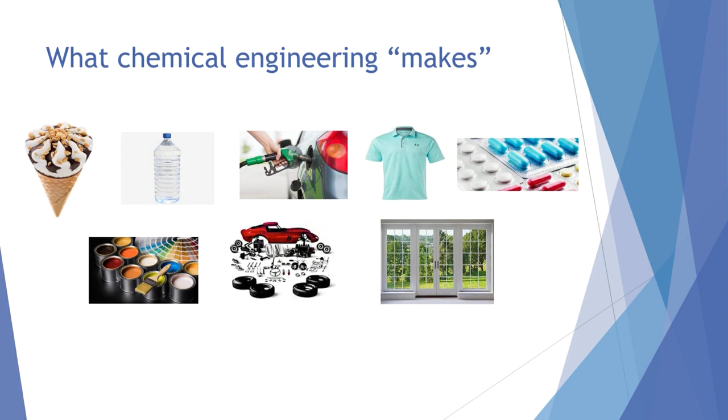What we put on textile, and what we take when we're not feeling very well. This is the medical products. And of course, chemical engineering makes a lot of other chemicals and materials. For example, the things we use for decorating, for driving, and for building the houses or other construction. So it also makes what we play, such as things we use for sports, for music, and arguably most important for some of us, this one.

But in order to make all of these, we will have to build a chemical plant or chemical factory. So this one is an oil refinery, a picture taken at night, which looks quite spectacular. This is for making different types of fuels. And this one is very different. It's smaller but much neater, I guess. It's a pharmaceutical facility for producing medical products.

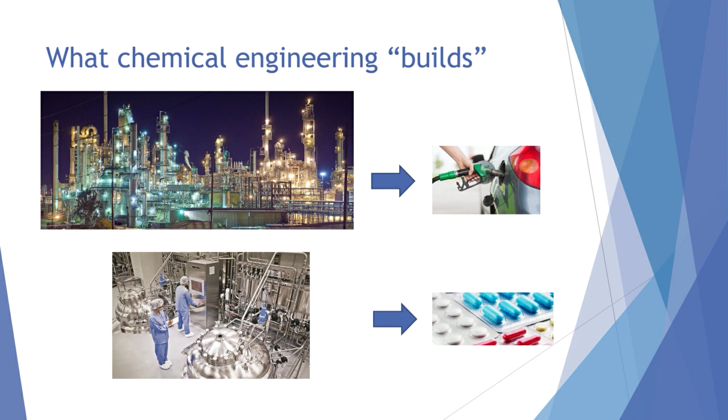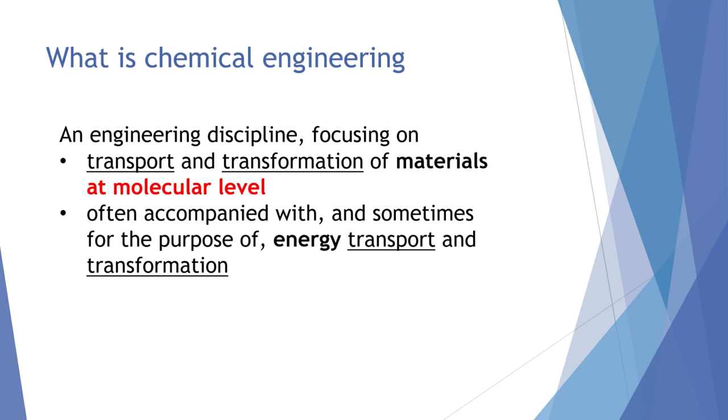So we have seen what chemical engineering makes and what it builds, but what is chemical engineering? I would say it is an engineering discipline which focuses on transport and transformation of materials, accompanied with the transport and transformation of energy. And what makes chemical engineering really special is that we do these things on materials and energy primarily at molecular level, which marks a key difference from, for example, civil engineering or mechanical engineering.

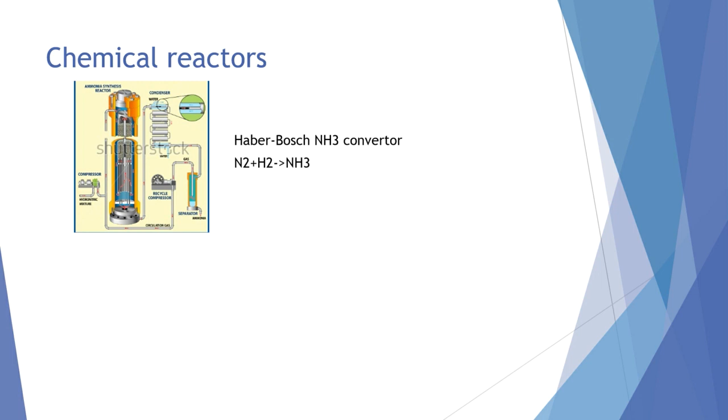Okay, so at the core of chemical engineering is the concept of reactors, and we have different types of reactors. If we start with the conventional chemical reactors, here I have got an example, which is the Haber-Bosch converter for producing ammonia from nitrogen and hydrogen. I put it up here because it is one of the earliest reactor designs operating at high temperature and high pressure with catalyst. And the other one I show here is taken from an oil refinery, a fluidized catalytic cracking unit, or FCCU, which is for producing short chain molecules from long chain hydrocarbons.

So the reason why I put up these two reactors is because they do carry some historical importance. If you look at Haber-Bosch reactors for making ammonia, many people believe that this kind of chemical synthesis of ammonia enabled by the Haber-Bosch process has played a very important role in food production, because ammonia is a major fertilizer, and this has been very important for sustaining food supply for the growing world population.

And what about FCCU? People who are familiar with the history of the Second World War might have seen the statement about the importance of the fuels produced by this technology in the victory of the British and US Air Force, because of the supply of high quality fuels required for the air forces.

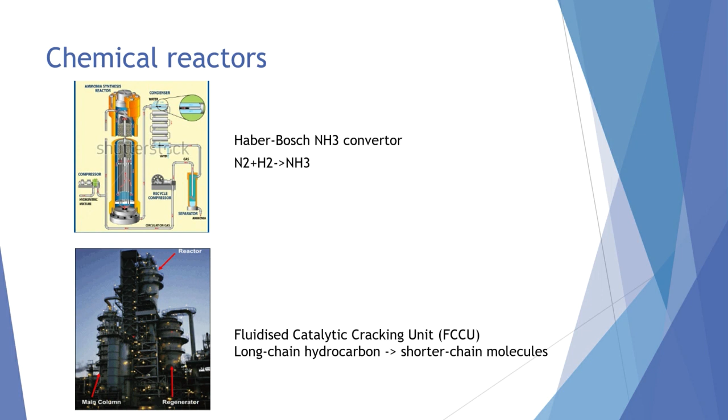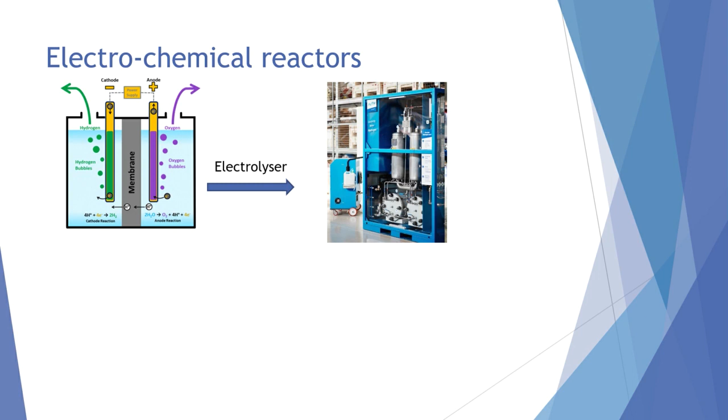But of course, reactors are not just chemical reactors. There are other types. For example, electrochemical reactors, which involve the conversion between chemical energy and electricity, and this includes electrolyzers, which convert electricity into chemicals, and fuel cells, which go the other way around, converting chemical energy into electrical power. And these kinds of reactors are becoming increasingly important in the context of generation and utilization of renewable and clean energy.

So then we have bioreactors. It's a very important type of reactor. Here I have an example of a fermenter. And some of you might know that a key microorganism used by a fermenter is yeast. And if you zoom in, you can see within these cells you have complex biological machineries which can be used to convert substrates like sugar into valuable products like alcohol through fermentation processes.

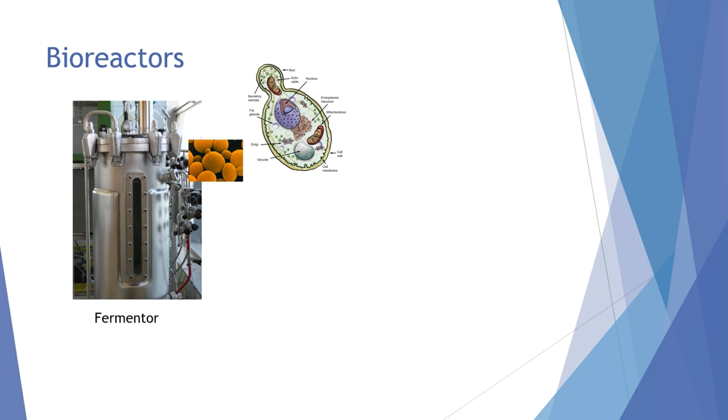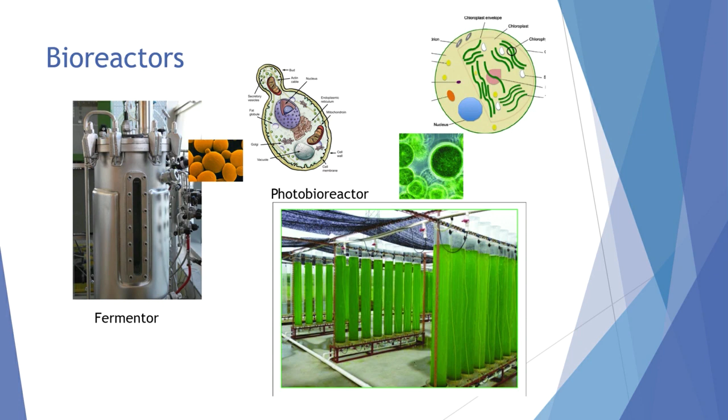And another example is the photobioreactor, where microalgae are cultured. These are unicellular microorganisms, again with an interesting set of bio machineries which can convert CO2 into biomass through photosynthesis, and then the biomass can in turn be converted to useful products. But of course there are many other examples of bioreactors. I'm not showing more examples here, but just to say that this biochemical engineering branch of chemical engineering is becoming more and more important in many areas.

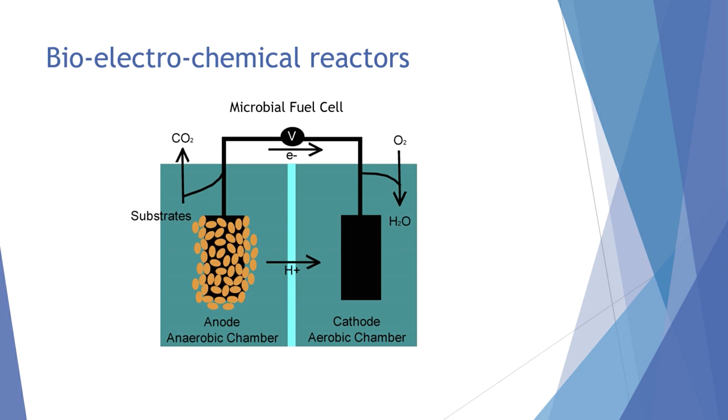So these are the reactors. But in chemical engineering, we certainly need reactors, but the operation of reactors will need to be supported by some other so-called unit operations, such as for mixing, separation, heat transfer, and pressure change. And in fact, the concept of unit operations was formed in the early 20th century by pioneering chemical engineers such as Professor Arthur Little, and the formation of this concept of unit operations somehow marked the birth of modern chemical engineering.

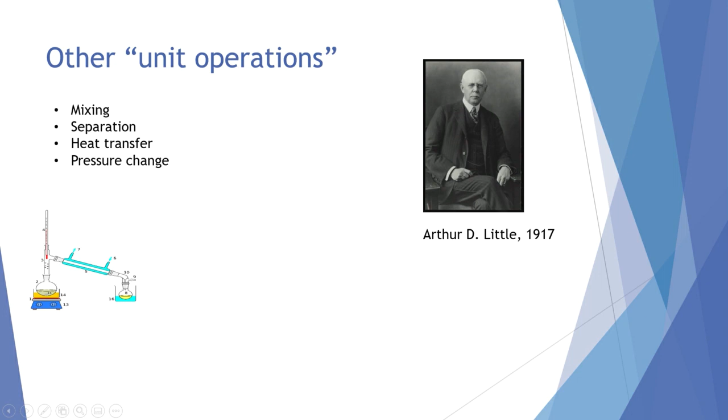So I have got an example here. If you have taken GCSE or A-level chemistry, you would recognize what this is. It's a distillation device. You might have played with it in your lab in your high school, and this is linked to a key separation unit operation. So it's a distillation column. So in chemical engineering, we do something very similar to what you have seen here, but just on a bigger, larger scale.

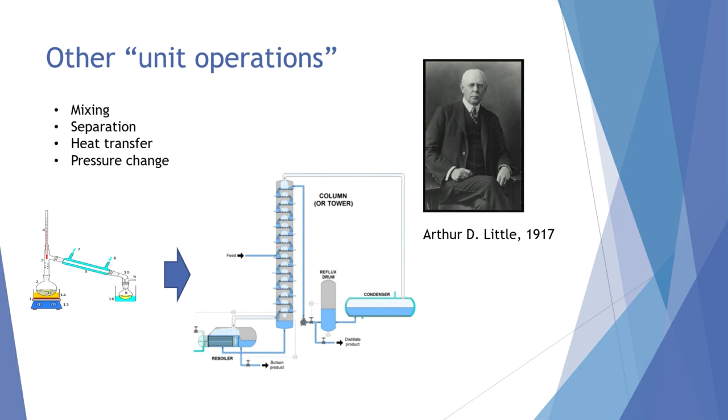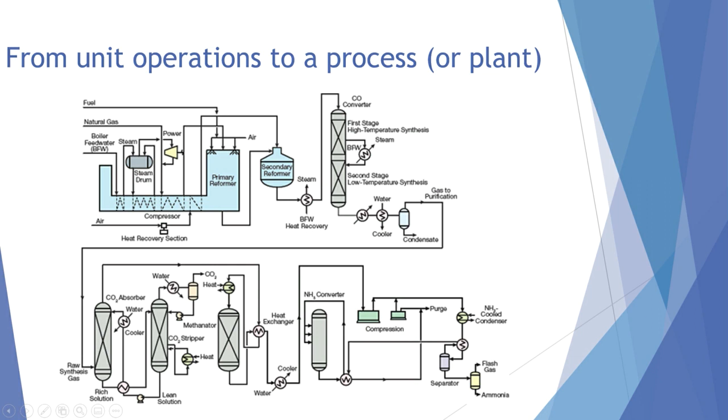As you can see, for the whole plant to work properly, you need to have the unit operations operate in unison, if you wish, so that we can run a productive and stable process. So the design and operation of such a complex process certainly requires a lot of thinking, a lot of careful design, a lot of careful decision making.

So what are the problems then a chemical engineer is expected to solve in daily life? Well, I'm sure this list wouldn't really surprise you based on what we have seen earlier. So we have the design of unit operations, design of the complex process and plant, looking after operation and control, and also design of products. But how would we judge whether we have done a good job on any one of these? Well, we need to look at a number of objectives.

So whatever we do, we have to ensure safety. Safety is always the most important thing for any engineering, but particularly for chemical engineering. And we always try to improve the efficiency of materials and energy, and to make things implemented in industry, it has to be profitable, so it should have good economics, and we do need to look after our environment as well as social sustainability. So you can see we have multiple objectives, which means chemical engineering is really a very, very demanding job.

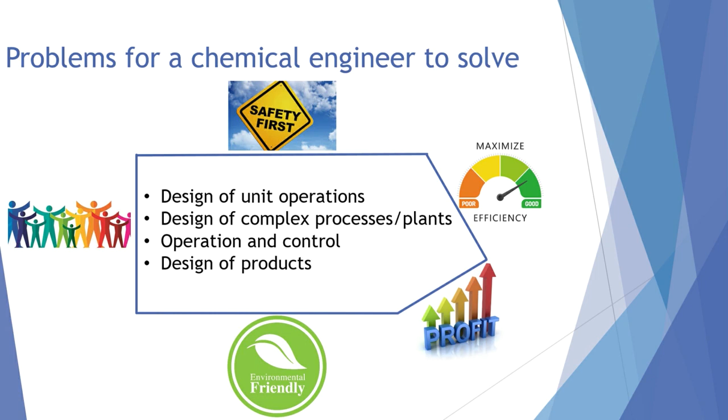So how can we make our students capable of handling such complex jobs? Well, we come back to the fundamentals. This has to be done by going through rigorous training. So in Oxford, in this department, if you look at the 4-year program, going from the first 2 years with common engineering training, and then into the 3rd year and the 4th year, where students can get a bit more specialized in one or several areas.

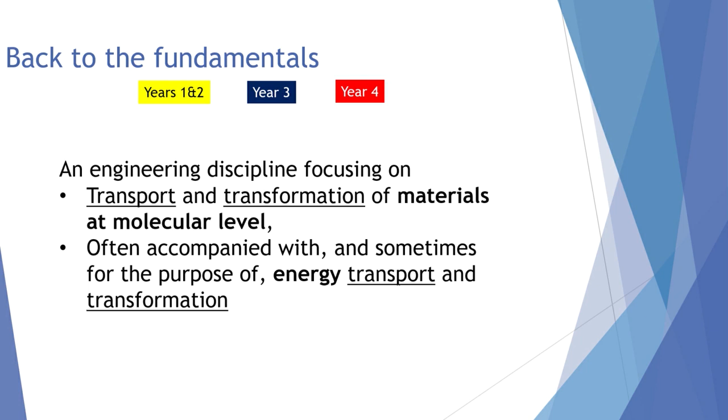So the students will be taking a number of courses which address all the important aspects of chemical engineering, either on the material side or on the energy side. So these are the specific courses, but don't forget that in year 1 and year 2, there are common courses in mathematics and numerical methods, engineering and society, and also thermodynamics, which are useful for all the engineering disciplines, but of course they are also very, very important for chemical engineering.

And then moving on to year 3, thermodynamics will be learned further, which forms a very important foundation for many aspects of chemical engineering. In addition to these different courses, we do have 2 major projects throughout the 4-year program. So in the 3rd year, there will be a design project. This is a group-based activity.

So at the moment, we're running a design project with our 3rd-year students in the area of carbon capture and utilization, and particularly it's about designing a chemical plant which can turn CO2 into methanol. Okay, so it's a very interesting topic. And then in the 4th year, there will be individual research projects, and every year there are a number of chemical engineering oriented research projects offered to our students.

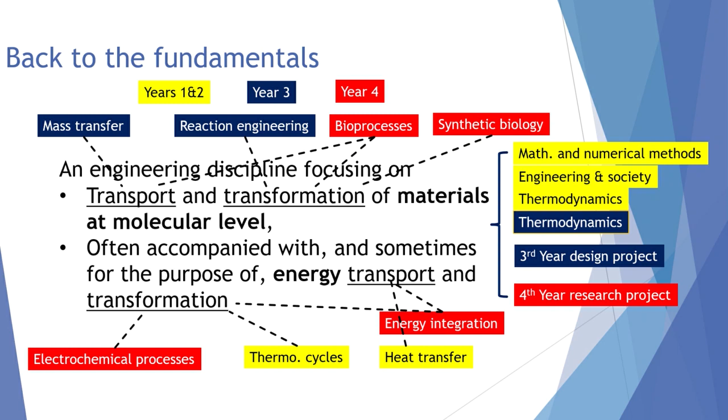So these courses and projects will, we believe, get our students well equipped for the chemical engineering career, but they will be educated not only to become the workforce today, but rather to prepare them to meet the demand of future challenges.

So here I guess we can look at a major challenge. Climate change is, I guess, widely recognized as a major challenge for our society in the future. And in the UK, for example, we also face an aging population, which points to the challenges in future health. So we have environmental health, we have human health, and chemical engineering should certainly make a great contribution to address the future challenges in both areas.

So how do we do that? Well, I guess there are two different things we can do. One is for the products or services chemical engineering is providing now, we can try to do them better, right? So the same products, same services, but we try to do them better. For example, in order to produce certain chemicals or materials, instead of processing fossil resources, we try to look at something greener to process, such as biomass. Okay, so in a sense, we can deliver the same chemical, same material, but by processing a different feedstock.

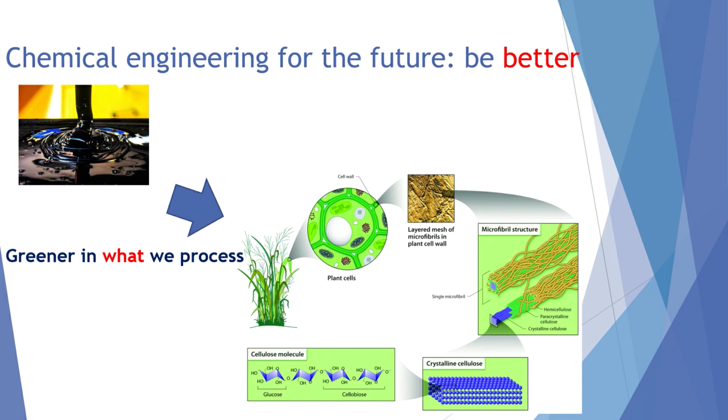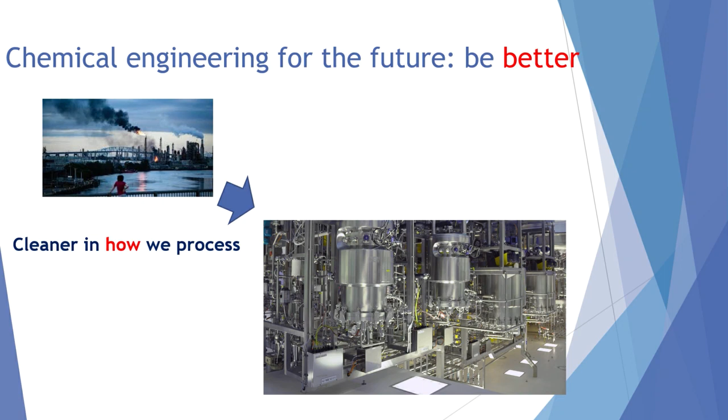Or we can be cleaner in how we process things by reducing emissions, reducing energy consumption, water consumption, for example. So this is about doing the things that we're doing, but in a better way. Another thing that chemical engineering can do to meet the future challenges is to start offering something different from what we're offering now. And I have got several examples taken from the research undertaken by our colleagues in chemical engineering here.

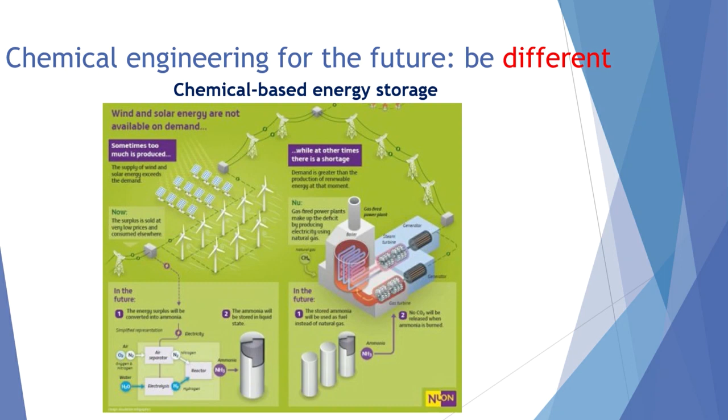And chemical-based energy storage is one of the energy storage technologies, particularly useful for long-term storage and storage in large quantity. Okay, so that is one area. And another area I show here is something called negative emission technologies. So this is about dealing with greenhouse gases.

We all know that we need to cut down greenhouse gas emissions so that we don't get into very dangerous climate change, which is certainly true, very important. But many people believe that we might have already got too much greenhouse gas in the atmosphere, particularly CO2. So the task of negative emission technologies is to take the CO2 which is already in the atmosphere out. And this can be done by different technologies. What is shown here, we have three things.

One is what is called accelerated weathering of rocks, to promote reaction between the CO2 in the air with some minerals. And this one is direct air capture. It's kind of a separation process. And here is bioenergy with carbon capture and storage. Basically, we grow trees, for example, and then we turn biomass into energy. But in that power conversion process, we capture the CO2 emitted. So all of these, you can see, are very, very closely related to chemical engineering.

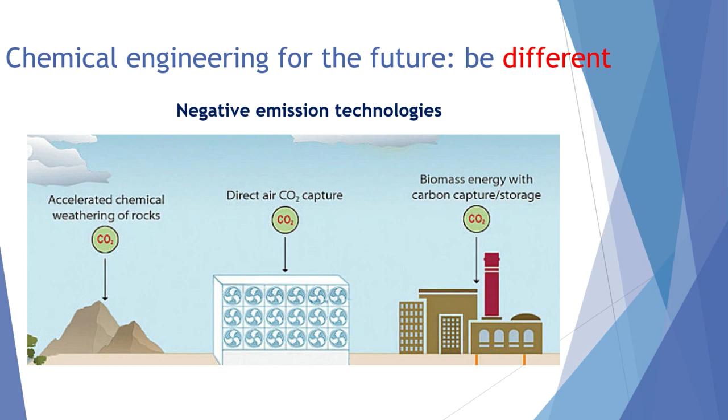And finally, if we move from environmental challenges to human health challenges, one example I show here is about stem cells or cell therapies. You might have heard of the good things that stem cells can do through cell therapies. But a fundamental requirement to do cell therapy is that you need to have a sufficient amount of cells in good quality.

So if you start with a rather limited number of cells, you definitely need to go through something called cell expansion. And this can be done by biochemical engineering techniques, particularly this packed bed bioreactor, which is capable of taking the small number of cells and doing the cell expansion to supply the cells in the required quantity and required quality to enable cell therapies. Okay.

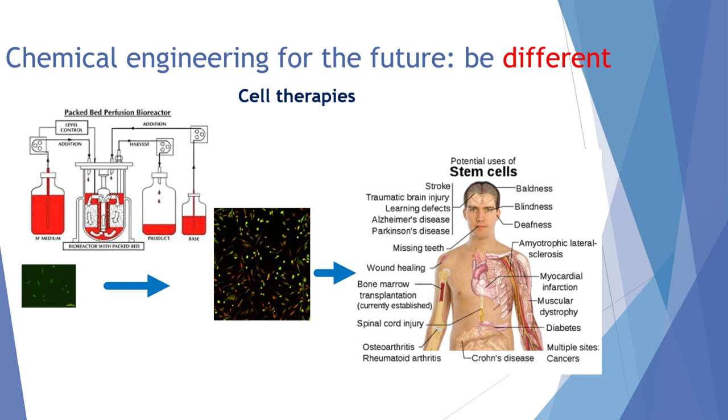So I think I'm coming towards the end of this introduction. We talk about chemical engineering futures, and perhaps we can ask whether chemical engineering is your future. Well, I hope through this lecture you have seen some exciting future offerings that chemical engineering can give to deal with future challenges, ranging from the environmental side to the human health side. And I also hope that you feel some of the fundamentals of chemical engineering are interesting to you.

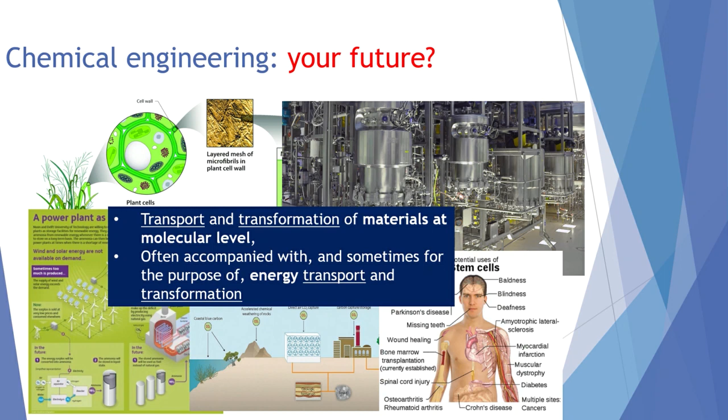And on top of this, if you are also prepared to do the hard work, namely taking the courses important for chemical engineering, then perhaps you can really consider chemical engineering as one of your future career options.